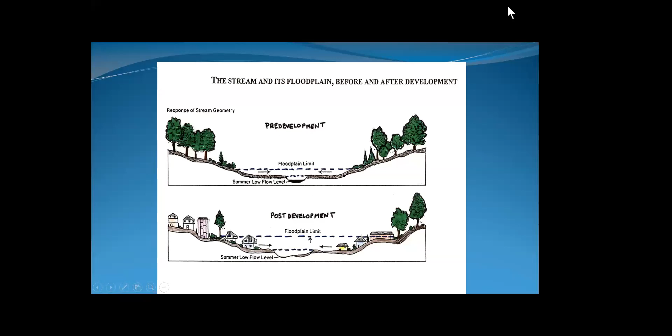Very good. Thank you. Thank everyone for being here. I hope everyone is well. This is the first time, I hope you enjoy my makeshift studio here, the first time I've actually been the presenter of a webinar. So I think it's going to go well. What I'm going to talk about today is actually, maybe I should start being the first time I've done this. And Melissa, I think you're going to have to take off the Glen Lake Association thing so I can share my screen. Ah, there we go. Is that looking good, Melissa? Taking that as a good. Okay. Except one more thing here. Sorry. Sorry, I didn't get to unmute myself. Sorry about that. I'm okay. Still here. It looks great. Okay, thank you. All right, very good.

So what we're talking about today is what happens to rivers as land use changes occur. Many of you may have seen parts of this before if you've seen me speak before, so I hope it's not too repetitive. Hope I've thrown in a few new things as well. Streams, as you may know, when you're walking through the woods and seeing a pristine stream, have a fairly identifiable floodplain and a base flow in the middle of summer, and the places you might like to fish or enjoy a babbling brook.

As development occurs and encroaches on the stream side and into the floodplain, a lot of changes occur. More runoff is delivered to the stream channel faster. The riparian buffer is taken away. Flood flows go up, base flow goes down, and the stream degrades. The fish pretty much think it's Armageddon and look for new places to live. And in the worst cases, if development is intense, some streams in Michigan have actually been paved. That's not really very good for anybody. It's not a very good aesthetic, and it's certainly not good for the fish and other creatures that live alongside the river. So we're going to talk about what causes that and maybe some things we can do about that today.

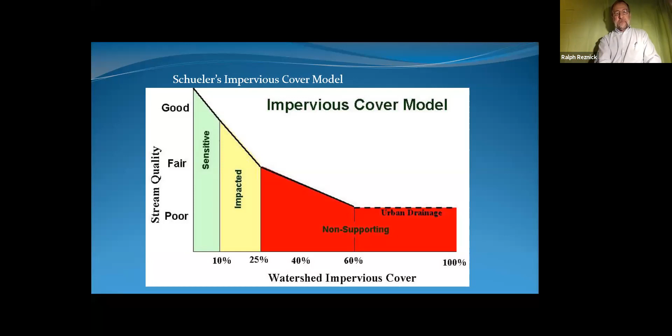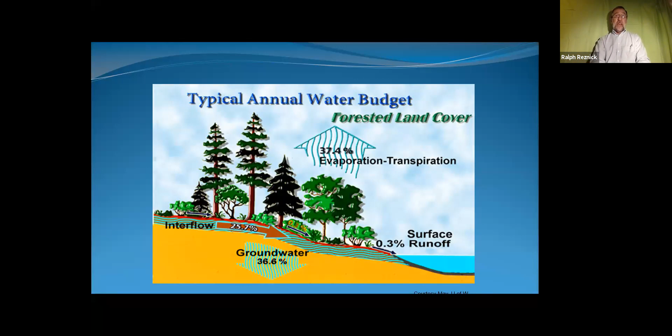And why is that? In forested, unimpacted, pre-settlement condition, very little surface runoff occurs. Most of the water that hits the ground from a rainstorm is either evapotranspirated, intercepted by the vegetation you have, or soaks into the ground, and what is delivered to the stream is through subsurface flow that provides base flow. So you maintain a decent base flow.

When you take away that riparian vegetation and build hard surfaces so that the water can no longer infiltrate as much as it did, you replace what used to go into the groundwater and was lost to evapotranspiration with surface runoff to a very great extent. You saw it was like 0.3% of surface runoff in an unimpacted condition, and in this calculation, 30% surface runoff. And that's all taken away almost exclusively from evapotranspiration and groundwater losses.

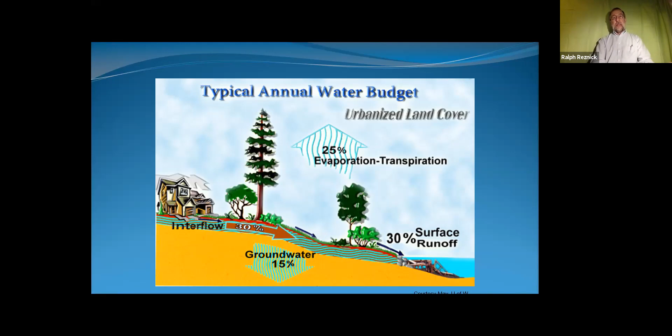A huge change. And the river has to try to adapt to that. And in the course of that, the water comes out of banks more often, causes more flooding and erosion. Just another, more straightforward example of how a typical development changes the flow pattern. And there we go, left that on.

So in an unimpacted condition, the surface runoff is very small. Once you build and add all this pavement and rooftops and take away the vegetation that used to intercept and evapotranspirate, this surface runoff gets substantially larger, very, very much larger.

There we go. Now, those of you who have worked in urban drainage know that one way to model the amount of runoff that you get is a method called the curve number method. We're not going to do any modeling today. I'm not going to do that to you. But the curve number itself is a good representation of the amount of runoff you're getting. So I'm going to use that in some of my examples. I hope you'll bear with me.

And what you need to remember is the larger the curve number, the larger the runoff. So curve numbers vary from 40 to 98, 98 essentially being pavement. And I'm going to be using those in some of my examples.

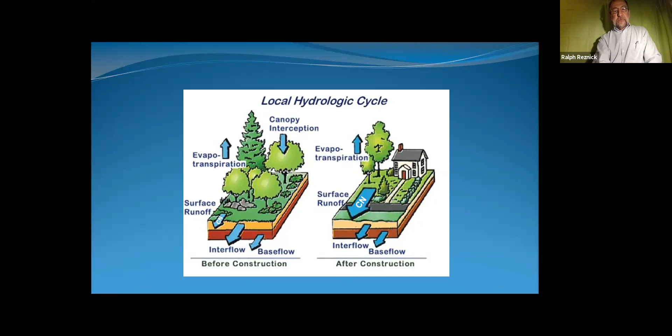So what should be attempted here is to reproduce the pre-development, or even better yet, pre-settlement, unimpacted by human interaction hydrologic response. And there's three things that dictate that. That's the time of concentration, which is the time it takes a drop of water to move from the furthest point in the watershed to the point of interest, generally the stream. The volume that's generated, which is as it says, the volume.

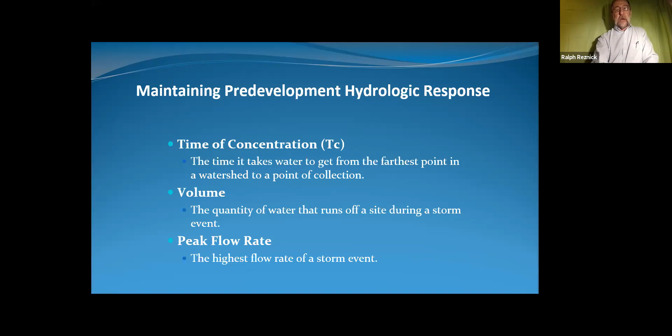So the amount of water that runs off will go up the more you take away the vegetation and put impervious surface down. And then the peak flow rate, which is the rate of water that hits the stream. So this is where the curve number comes in.

In an unimpacted stream, a hydrograph, so the amount of water that's discharged over time, looks something like this. In an unimpacted farm field, in this case, the curve number is roughly 70, and the time of concentration, the time it takes to go from one end of the field to the stream, is about 0.75 hour, 3/4 of an hour. That flow rate is 23 CFS, and the volume is about 5 acre-feet. And the curve looks like this.

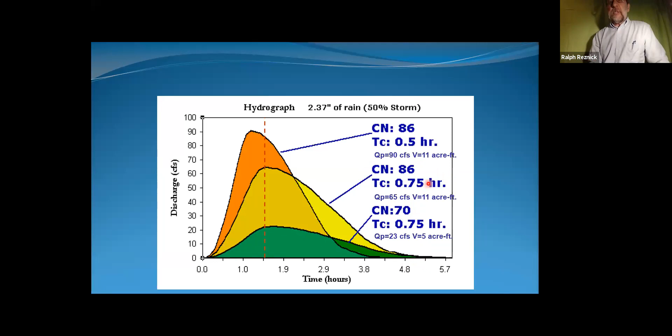With not a very big development, residential development, houses, driveways, streets, the curve number jumps up to 86. Not as high as it could be, but still much higher than it was. The flow rate has gone up almost 3 times, and the volume has more than doubled. And the curve looks like this. And you can see all this area under that yellow curve, and covering what's masked by the green, is the volume. That's the amount of increase it's seen. Excuse me.

If we are basically not changing the time of concentration, we're running the flow still through yards and swales and not into curb and gutter and pipes. If we do that and cut down the time of concentration to a half hour, the rate goes up much more to 90 CFS. The volume remains the same because all we've done is put the water that we've generated into a quicker conveyance, but we've shifted the time. So now we've made the peak rate much faster that's hitting the river, and it happens much sooner.

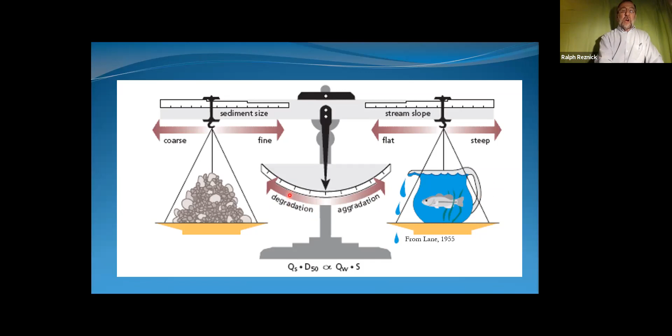What's stable? A stream is determined to be stable when it can maintain its pattern, dimension, and profile over time without aggrading, which is filling up with sediment, or degrading, which is erosion. The pattern is, of course, the meanders everyone's familiar with in the stream. Dimension is what the cross-section of the stream looks like, and the profile is the slope of the stream, basically, and the bed features that go with that.

Now these, first of all, are dynamic. They move, so these meanders may move in a certain direction, but the pattern itself stays the same over time. And same thing here, this bed form feature, this riffle may move further downstream and reform, but overall, the amount of riffles and the overall slope that's defined by that stays the same. And what's been documented is that happens at roughly the 1.5 to 2 year peak flow event.

So we can determine what a stable channel shape looks like. And we know that happens between the 1.5 and 2 year event. And we can then look to see when that stream's not fitting into that stable form any longer.

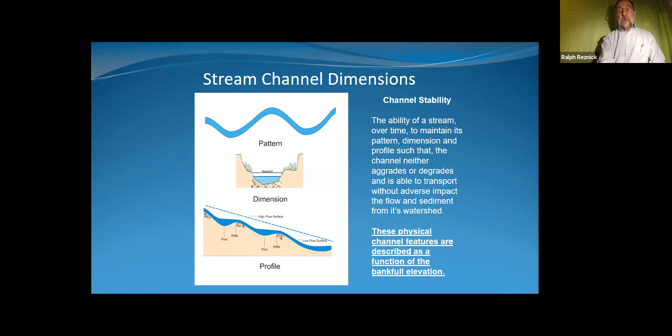Just another word about bankfull stage. That is the stage where in a stable stream, the water exits out into the floodplain. It's the event that does the most work. The most sediment is moved, and the most deposition and erosion occurs. Sometimes you won't see it though. You'll see a sand bar move.

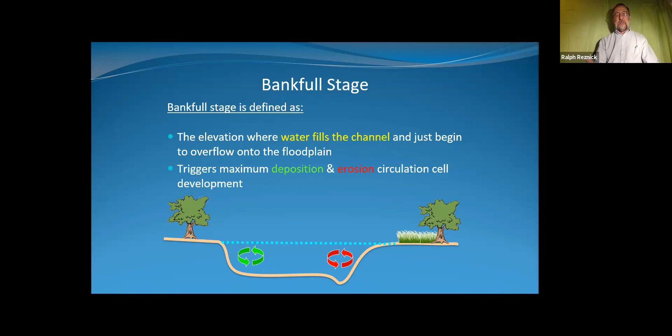It could be picked up in the event, and it's chocolate and muddy and you don't see it, and a new one's deposited right where it was, and once the stream goes down, you may not even know. Or a whole lot of erosion goes on and you're seeing stream banks being eaten away due to high flows. This is just an example of where the floodplain is in a stable stream. It's easy to find.

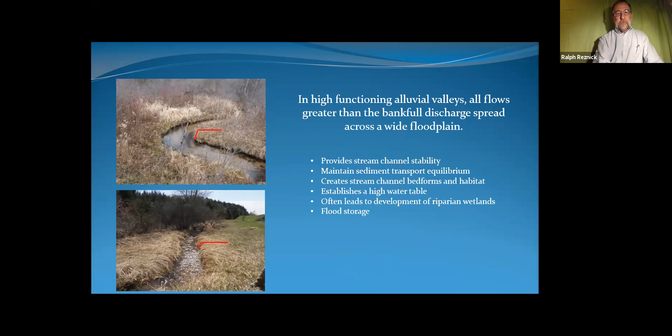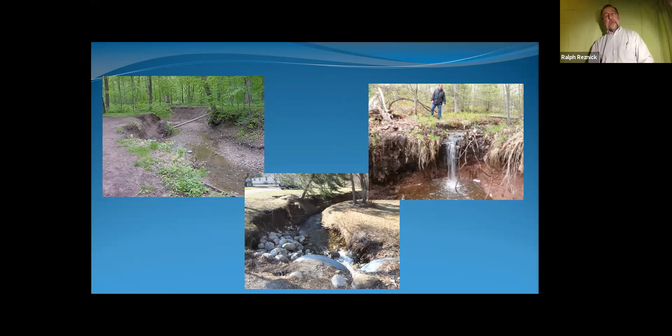When you go back to that high curve number and high flow amounts from the land use changes that are not controlled, that are not limited, change the hydrologic response, this is what occurs. Significant erosion, where now this is downcut, the floodplain was up here. This is downcut, that base flow is much reduced, but during rain events, this channel fills up.

Extra flow was put through this culvert as development occurred and ate away down here once this culvert was changed and allowed the increased flow to move through this area. And this is a major head cut. Where I'm standing up here is going to disappear over time. This head cut will continue to move further upstream. As you see, this flow is not very large right now, but in a storm event, it becomes much larger and eats away at this bank.

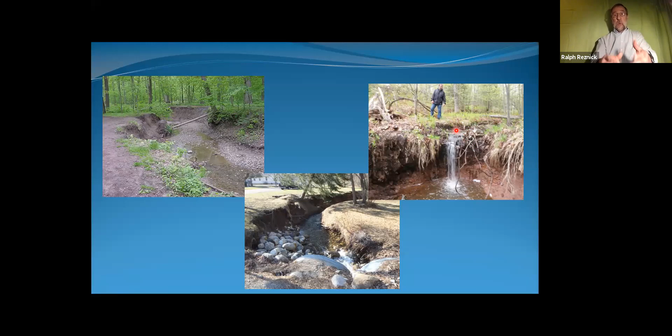This whole thing is described in a channel evolution model. There's a few out there, but this particular one was developed by Simon and Hupp, and it just shows what happens. In this case, it shows what happens when you create a drain. But the same thing would happen if the degradation occurred because of a head cut or erosion, because this channel no longer had the capacity to handle the flow that was now being sent to it from development.

So the stream would deepen over time. It would slough off from the banks and begin to widen. It would downcut so far, and then it would begin to widen, slough off the banks and add sediment to the system that it needs, that it wants. As that occurs, a lot of that sediment is deposited; it has the energy to pull in sediment, but it doesn't have the energy to move it, and it begins to aggrade. Over time, that material will aggrade back up, not at the upper level that it used to be, but in this lower elevation, and create a new floodplain and stabilize.

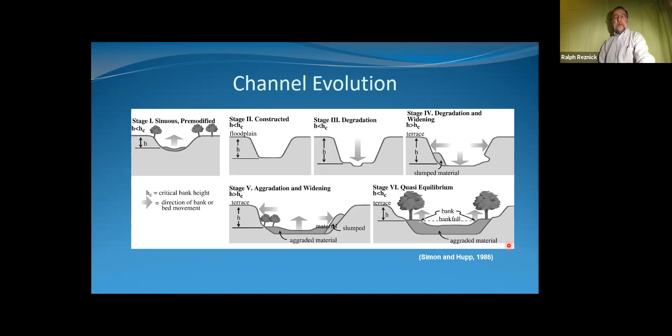In this case, the only hydrologic change that occurred was that the stream channel was reconfigured because of the drain. If this had occurred because of hydrologic changes in the upstream watershed, this may not have been able to stabilize. It would still be in a state of chaos because of the continual high flows and volumes.

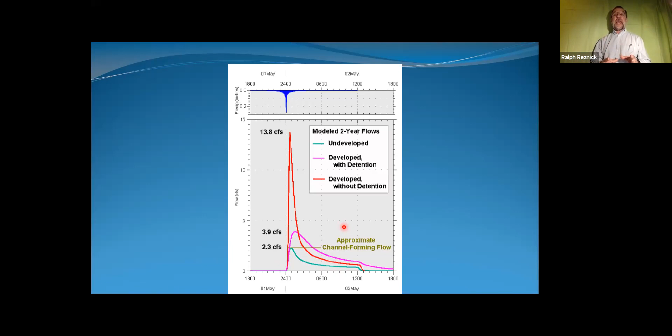And detention is just filling up a basin with water, capturing the storm flow and letting it be released at a lower rate. That's very helpful. It takes away this peak, which is a problem. People recognized that early on. They've been putting in detention basins for decades. But you can see that underneath that pink curve is that volume we talked about earlier. And that is still far greater than what an undeveloped volume would be. So we have to work on addressing that to provide assured stream channel stability.

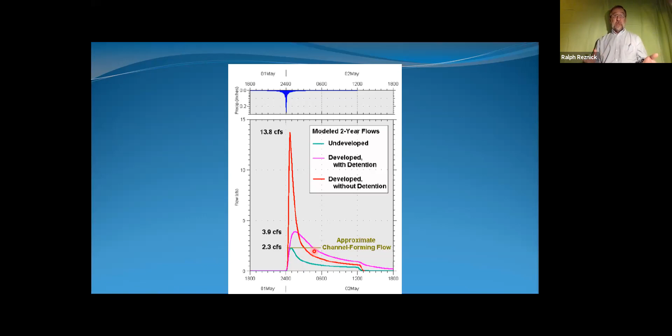The idea here is to preserve the features that are working in the benefit of the stream, that are capturing the water. The woods intercepts the rainfall as it's coming down and picks it up from its roots and evapotranspires it. Reducing the amount of pavement reduces the amount of volume that can't get back into the ground.

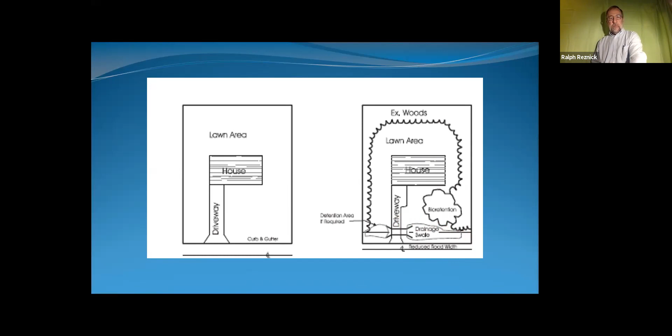And then a swale here instead of a closed pipe was used to convey drainage away from the house. Drainage is still provided. The house is high and dry, but the volume of water up to that 2-year event can be captured using this kind of design, and possibly even more if there's flooding issues that you'd like to address as well, in order to protect the stream habitat shape and keep it stable.

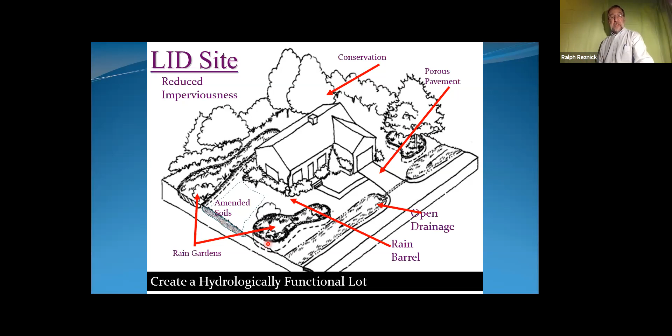So what are the techniques? One of the most simple is to control the time of concentration, the time it takes a drop of water to get from the furthest point in the watershed to a point of interest. In this case, it would be after the stormwater pipe, but through this swale, the idea is to maintain those natural drainage paths. There is no curb and gutter here.

Curb and gutter intercepts the water immediately, puts it right in a pipe and gets it to the stream very fast. And it captures nearly all of the volume that hits it. This lets water flow to this catch basin slowly. It allows the water to infiltrate into the ground along the way. And if this is raised even just a couple of inches, it will hold water to infiltrate even further once it gets there, as the rainfall becomes more heavy and more water accumulates there. This design could easily capture a 2-year storm.

Maintain the trees, the large trees in the canopy. You can also minimize the disturbance that you do. Don't interrupt the vegetation that's already there and would have to be reestablished. And maybe that vegetation is more native or more rigorous, maybe woody shrubs, and that would take a while to reestablish.

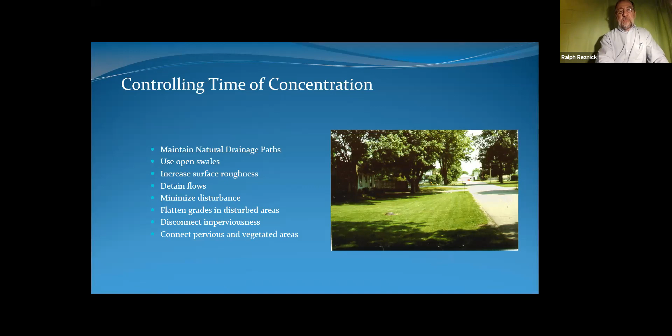To go further, I think you've probably all heard of the term rain gardens, sometimes called bioretention. Bioretention is sometimes a little more rigorous. That's essentially where you capture water in a slight depression. If you don't have soils that can infiltrate, amend these soils down to about 4 feet, and also make a good planting soil for whatever vegetation you decide to use. You can make this large enough to capture a 2-year storm from, say, your rooftop or your driveway, sidewalks, things like that. At your residence, you can make them quite colorful and nice to look at.

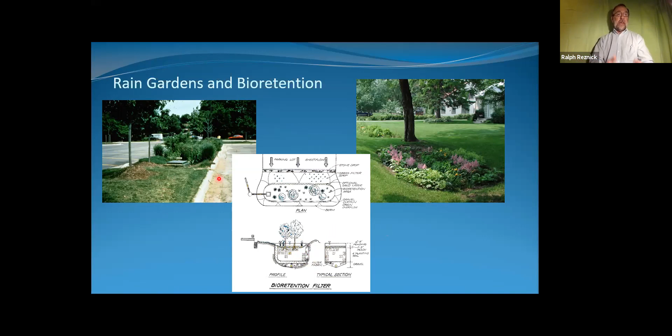In a parking lot, they're established with curb cuts intercepting the water. Instead of making traffic islands, you've now created traffic valleys and capture the water in those valleys. The vegetation varies depending on what you're trying to accomplish. Certainly when you use these curb cuts, you also have to have some grade stabilization where the water comes in, and you've always got to have a bigger outlet.

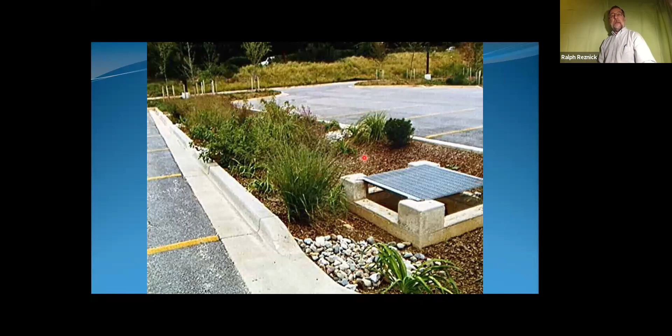So remember I said that we're trying to capture that 2-year storm. Larger storms are delivered to some form of drainage system. Sometimes it's back out into the road, sometimes it's into a stormwater system. You could use a rain garden to capture larger storms, but you get into issues with holding more water and how long the plants can handle that. But you may want to do that in order to address flooding issues if you're having serious flooding issues.

Same thing with a home rain garden. In this case, you can see right here a little outlet. A lot of the time, a home rain garden, notice it's right next to the road. You can barely see it here. Additional runoff, when the rain garden fills up, will run off into the road, which becomes the secondary conveyance.

Just use less pavement. That's probably one of the most intuitive things. I've used this example for a long time. There's many more now, but it was a famous road out in the Puget Sound area, out in Seattle, I think, that narrowed the road, limited parking to intermittent spots, so you didn't need a whole lane on either side for parking. Sidewalk on only one side, so it reduced the amount of imperviousness for that purpose, and created bioswales or

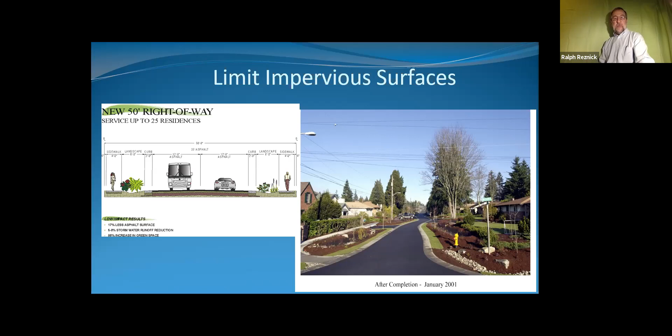massive rain gardens on either side of the road to capture the runoff. So it didn't go into a pipe until it reached those larger flows. And this could be a simple thing in your design of your property. You know, how big of a driveway do you need? Or maybe you can use pervious pavement. I'll talk about that in a minute.

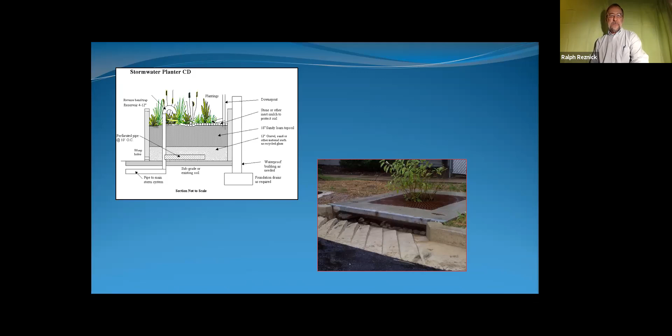So we talked about rain gardens. This is a compacted, highly engineered rain garden, so to speak. It's a tree collection device that basically routes water into a tree planting, or in some cases you can use shrubs or a variety of other deep-rooted vegetation, and direct water where you have a tight spot into these structures and grab the water there, just like in a rain garden. And higher flows would go down the street and into the first catch basin.

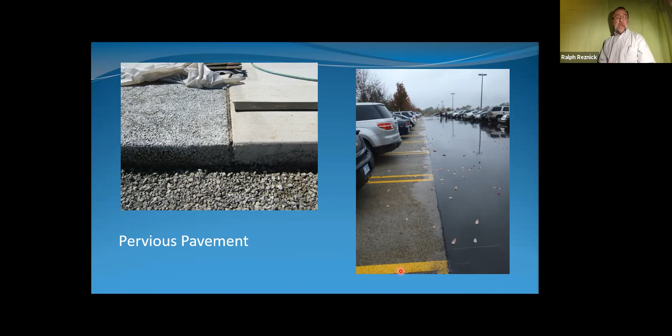and avoids the need to capture the water another way in, say, a large detention basin or maybe underground detention. This uses the space where parking is still being used, but capturing the water. Other configurations of this, by the way, are pervious pavers and geogrids.

Rainwater harvesting, take the water out and reuse it. Many of you have probably heard of or seen a rain barrel that you could put around your house, capture the water from a storm, and use it for your gardening or other purposes. Captured to a larger extent, some places can use them for their toilets, for non-potable water, basically. You wouldn't use it to wash your hands, although there are places that use rigorous filtering.

I don't think we can do that here in Michigan, but in some states they allow rigorous treatment of captured water and use it for potable uses. But for the most part, here in Michigan, it's either used for toilets or other non-potable uses if it's captured to a large scale.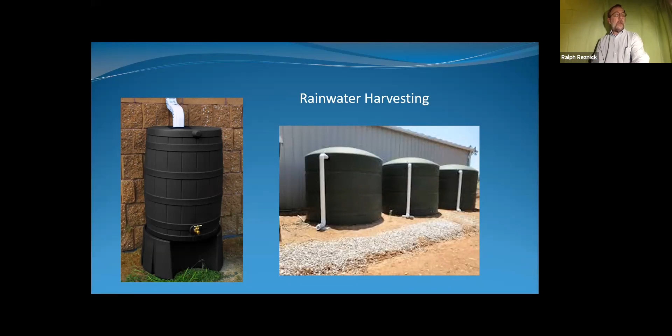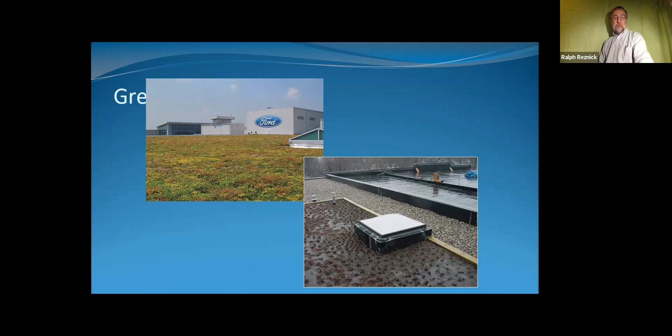Obviously, you can only capture so much. Most places, struggling here a little bit, there we go. Most places use a plant material called sedum. It's not planted in anything much thicker than an inch or two that's shown here, and therefore it doesn't make much weight. A lot more roofs can use it. It sucks up the water and holds it until it can evaporate. Excess water then runs off, maybe into a treatment wetland or into a smaller bioretention cell.

Oh, sorry. However, if you've got the structure for it, you certainly can plant more rigorous vegetation up on your roof. And some places have done this, and maybe even put a little walkway out if they have an entrance that can get out here and enjoy the vegetation they've got. Give it a little green space in the city.

I want everybody to really think about the use of trees, just the use of trees. Large deciduous trees primarily capture an awful lot of water. If you think about the total surface area during the summer, during full leaf out of a large maple, it's several football fields if you add up the surface area of each one of those leaves.

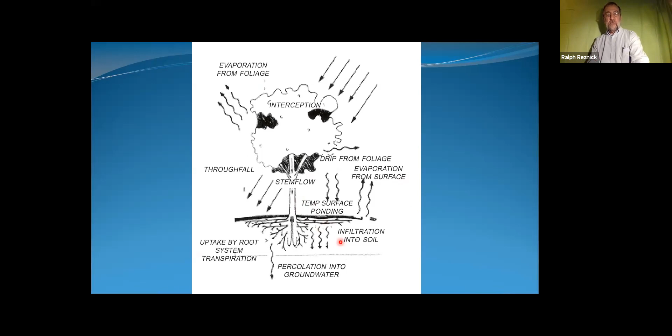And just to illustrate that, I'm going to use that curve number again. If we had open space on C soils, and I didn't explain the different soil types, but C soils are getting a little tighter, not quite as absorptive as sand, and not as tight as clay, but we're getting tight, harder, generate more runoff. Open space would have a curve number of around 79. So think lawn, and maybe not very healthy lawn.

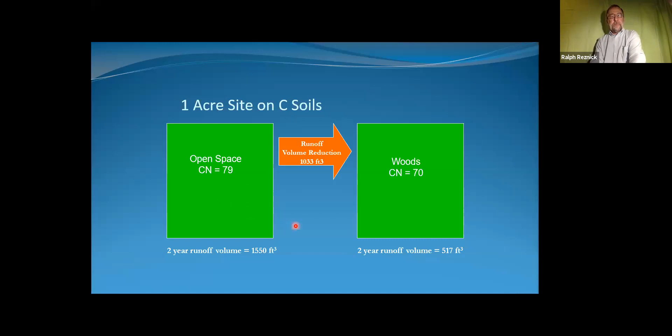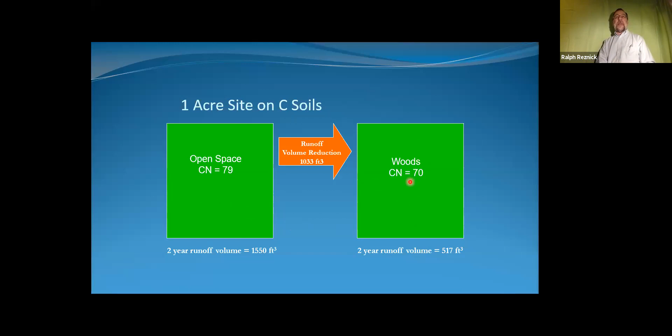If we made that a woods, that would drop that curve number down to 70 and make a significant loss. So something to consider, as simple as, instead of trying to think about how big a hole to dig for bioretention and which plants to plant, which isn't that hard. I don't want to make it sound hard, but if you don't want to go through that thought process, planting a lot of trees on your property would be a huge help.

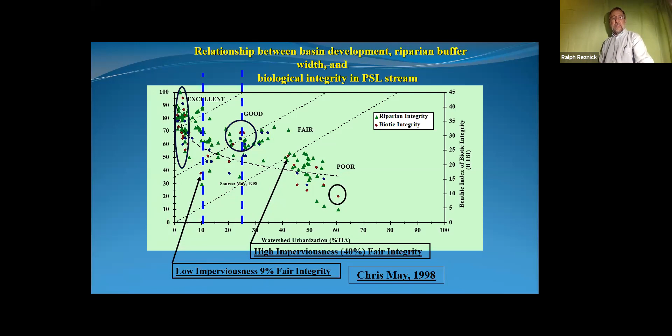So I want to go back to this for a minute, because I mentioned about the buffers, that even where imperviousness between 10 and 25% impervious area in the watershed was occurring, where the buffer remained high, the quality didn't go down as fast. So I want to talk about buffers for a bit.

There have been several studies, and the studies vary. We did in the Nonpoint Source program back in the early 90s, mid 90s, I guess, a literature search at the time, and found that with the literature we looked at, if you have a buffer of less than 100 feet, impacts begin to happen. There were various impacts depending on the study. Some were wildlife, some were fish habitat, some were quality. But at 100 feet, you start to impact the stream in a negative way, reducing the buffer.

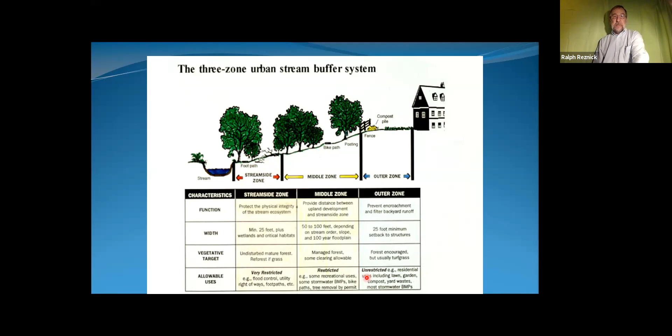Wisconsin went way more detail than that, but it's a good example. It shows how the water quality benefits can be handled with the very close stream side zone of 25 to 50 feet. Here, the minimum is down around 20. Previous guidance for filter strips, the minimum distance was 20, but all that really did, with dense grass, was keep sediment that was on a farm field or something nearby from going directly into the stream.

Adding width and more rigorous vegetation like trees, like bushes, provides higher quality, removes more of the water that's being directed to it, stops more of the pollutants, provides additional habitat, and depending on how big the stream is, possibly temperature benefits and other benefits as well. But if you want to get into wildlife benefits, the stream side buffer is substantially larger. This is recommending as high as 800 or 900 feet. Minimum goes to 400 or 500 feet in order to provide different types of wildlife habitat.

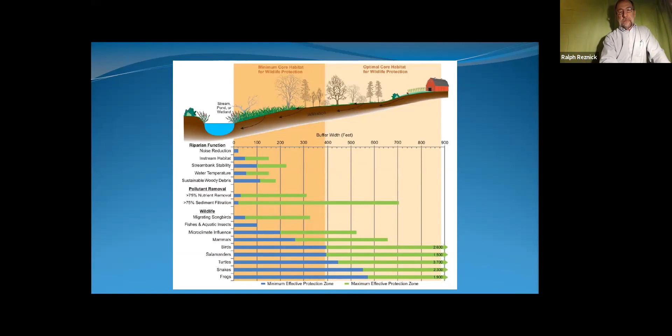So after you've done all that though, even if you could restore the hydrology in downtown Detroit or downtown Chicago to the pre-settlement rate, a lot of the streams would be already impacted, and you'd either have to wait a long time for the stream to heal itself and live with the erosion and habitat disruption the stream would be causing while it did that, or you could start to help it.

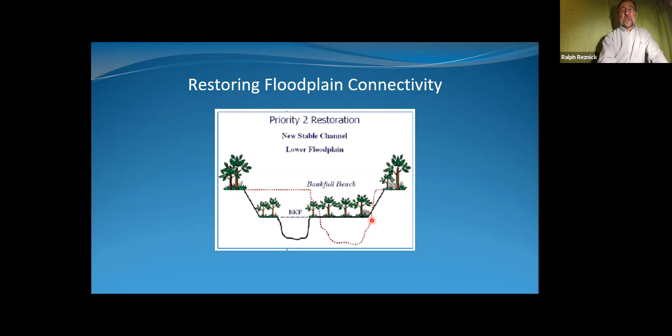In a lot of cases, particularly where we deal with county drains, but where a stream has been degraded and has down cut and lost access to the floodplain that was up here, you could recreate, you could dig this out wider. There's a couple ways to do this. This example shows that you filled the old stream channel, but I'll show in a minute another way to do it. But you basically recreate the floodplain at the lower level. Dig that area out and give it the space it needs to remain stable. Let the stream develop bed features and pattern on its own.

You could enhance this. We know about how big this is. Where you need to still provide drainage, you can just dig those ditches. It allows the low flow channel to stay stable, prevents sloughing, but still provides the flow that you need to prevent flooding.